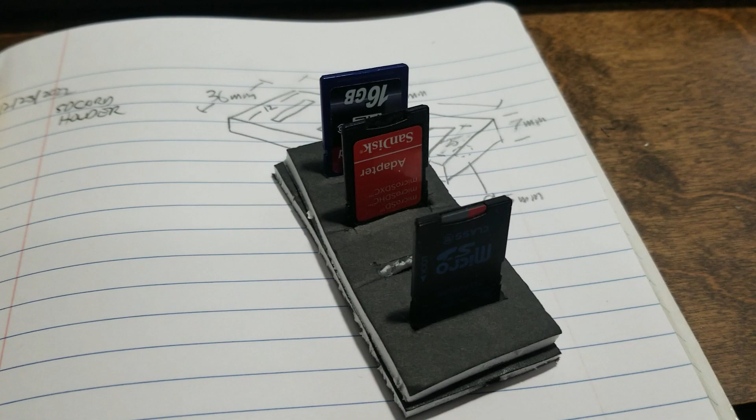I'm going to create an SD card holder that'll come in handy for the 3D printer. I made a little prototype of what it looks like. There'll be slots where you can stick the SD cards in, and there's going to be some magnets on the back. So I created a little prototype to figure out the right sizes, and then I drew a little sketch so I know all my dimensions. We'll make this in Onshape and 3D print it.

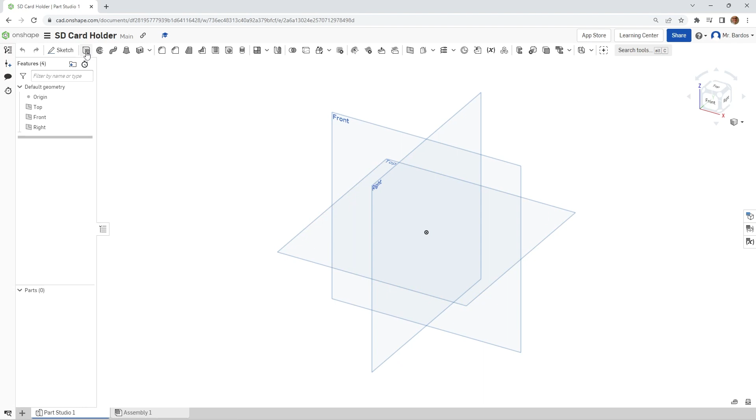So when you go into Onshape, you're going to create a document. Every object you create starts out with a sketch, so first you're going to pick where you want to draw the sketch. I'll have my sketch on the top plane, so I'll click Sketch, click on the top plane.

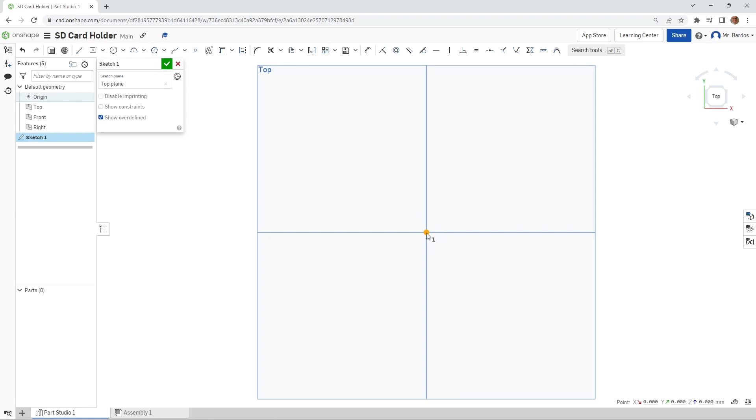I can draw right now, but it's kind of awkward looking at it at an angle, so I'm going to click on top here and we'll look straight down onto the top plane. So I'm clicking on Center Point Rectangle, and I'll start by drawing a rectangle.

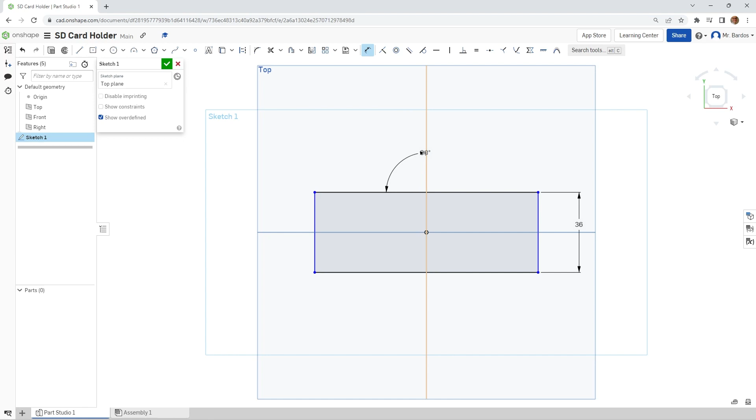First I'm just going to draw a rectangle, and now we can click a dimensioning tool to make the rectangle the right size. According to my sketch, I wanted this 36 millimeters, and I wanted this to be, let's start with 76 and see how that looks. Click on this one, 76 millimeters. We can change these later. Double click on that, fix that back again. Okay, so now we have the dimensions that I want.

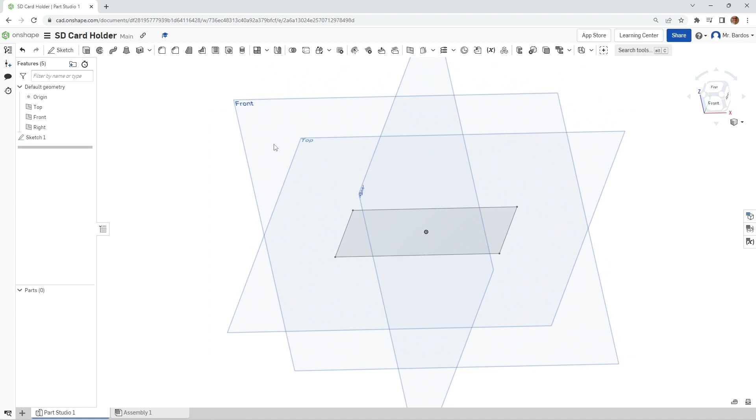These constraints are very useful, and we'll look at those a little bit more later. So right now, if I click on check, I'm holding the right mouse button and scrolling around looking at this, it's just flat as a pancake. We need to give it some depth.

And that's what the extrude tool does. Click on extrude, click on this, and you can mark how deep you want it to be. I only want it to go up 7 millimeters, according to my prototype, and hit OK. And we have ourselves a box.

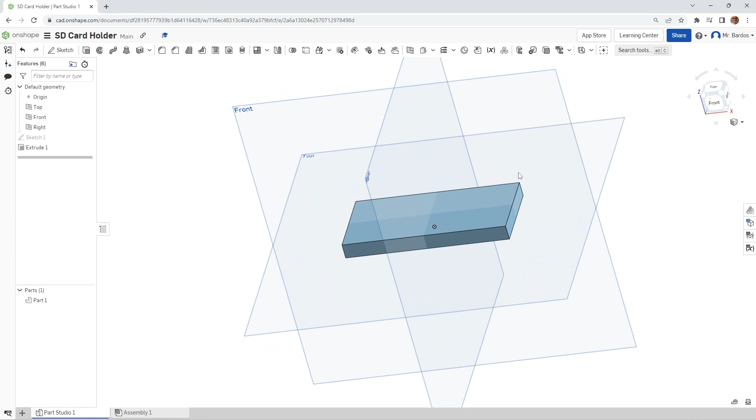Once again, I'm holding the right mouse button and moving my mouse around to scroll and pan like this. You can always click on this to go back to some standard view. To zoom in and out, I'm moving the wheel on the mouse in and out. Okay, let's go back to the top view.

Well, actually, before we do that, I'm going to make the slots for the SD cards to go in. And I'm not going to draw it on the top plane, I'm going to draw it on this top surface. So I hit Sketch and click on the top surface.

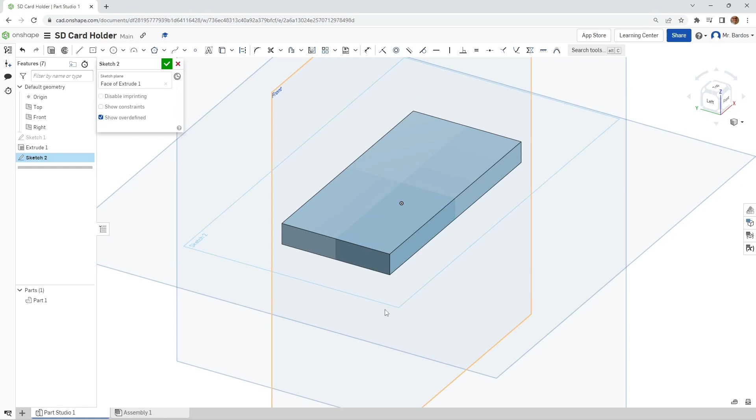So now I'm going to be drawing my rectangles on this surface. We'll go back to top view, look straight down on this, and create another rectangle. And again, I'm still using center point rectangle.

You don't have to stop and use the different dimensioning tools, although it is handy. You can just type in the dimensions when you first create an object. So I wanted this to be 2.5 millimeters wide and 25 millimeters deep. And I want 4 of these.

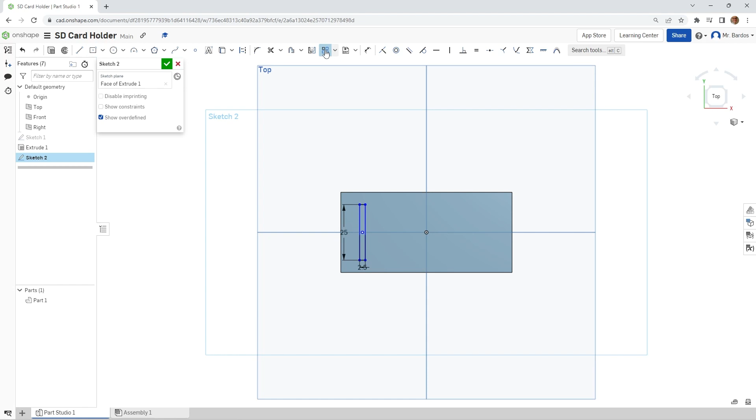Instead of drawing these over and over again, there's a tool that'll create a linear pattern. So I click on that, click on the objects that I want to repeat. I'm going to zoom in a little bit. It says I'm making 3 of these and going across. I'll double click on that to make it 4 of them. And here's where I get to specify how far apart they are.

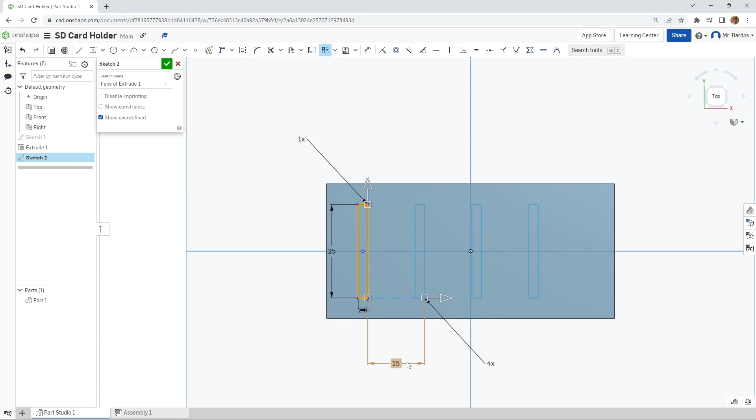Again, from my prototype, I think I wanted 15. Let's take a look at that. And there are 4 evenly spaced rectangles. So right now it shows that I should click on the left mouse button to finish this.

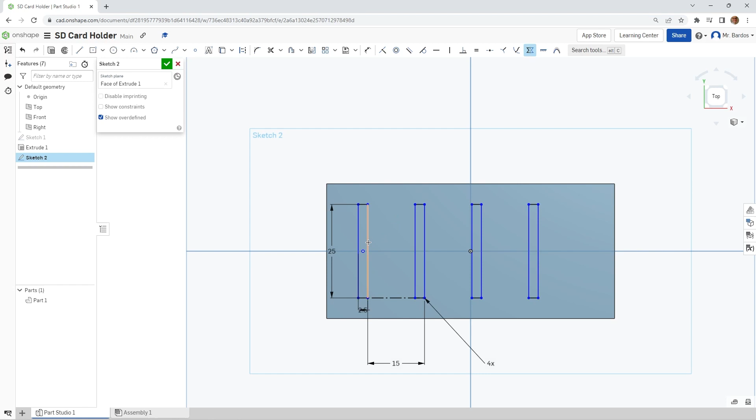Now these aren't centered correctly, so I want to make them centered about this middle line. And there is a constraint that we can use that says we can make things symmetric. So this tells us what to do. We click on this, and I want to make this and this symmetric about this axis.

So I clicked on those three things and I moved things over. No matter how big we make this or move things around, these things will always be mirrored, essentially mirrored along the y-axis here.

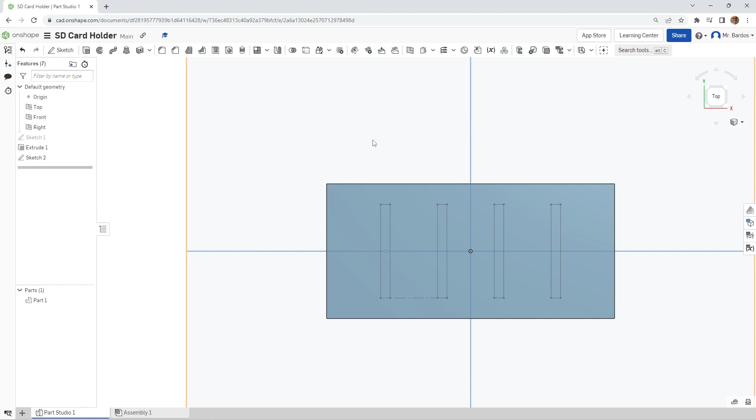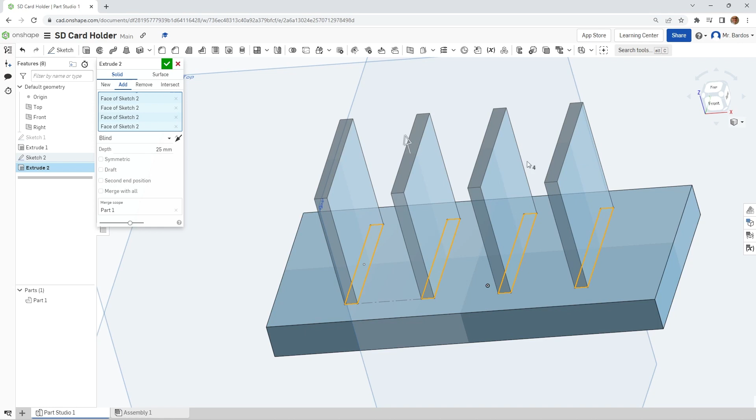So these are going to be the holes where the SD card goes in, and right now we have to take the material out of these holes. This is also an extrude. So when we extrude, it defaulted to either adding material or adding a new part. But in this case, instead of adding material, we're going to remove material. Now I removed way too much—the whole thing was 7 millimeters deep, and I think I only want to go down partway.

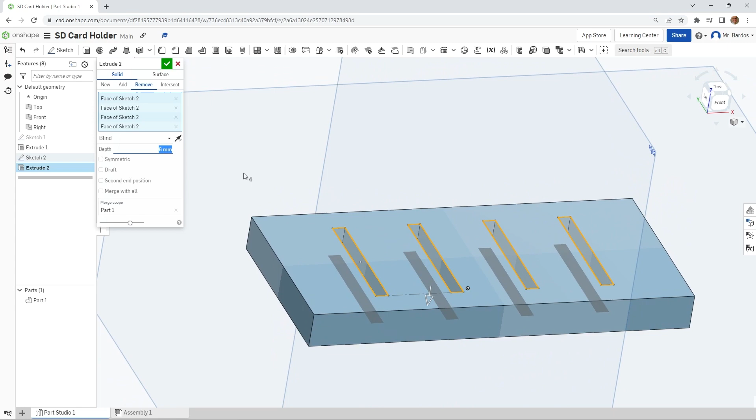Let's only leave maybe 1 millimeter on the bottom. It doesn't need to be that strong, so let's actually go down 6 millimeters. Now this has cut out the slots that we need for our SD cards.

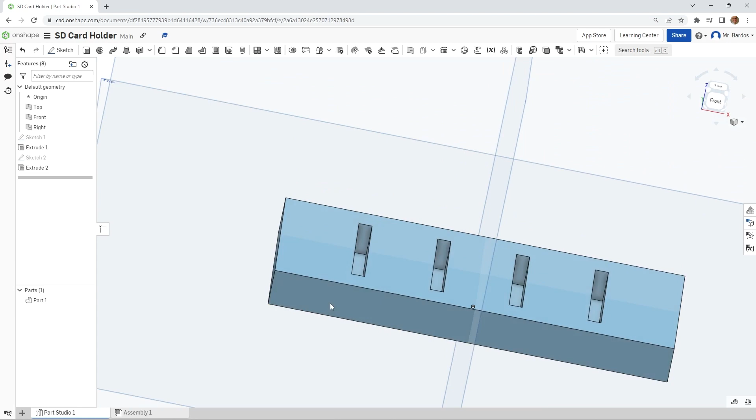Okay, so let's now go to the bottom and make the holes for where we want to stick the magnets. Now this one, we could have drawn the holes at the beginning because I want to draw the holes on the same plane as where we drew the box to begin with.

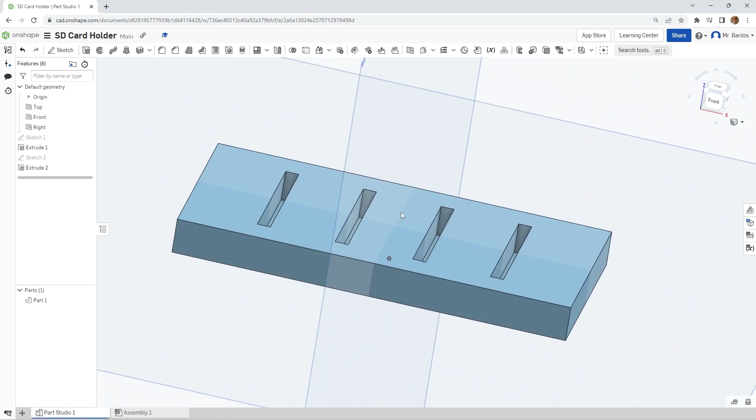By the way, to move things around like this, I'm holding the mouse wheel in and dragging the mouse. If you spin the mouse wheel, it goes in and out. Once again, the right button spins it around so I can look around, and you can always go to some standard view this way.

So what I want to do is, instead of just drawing the rectangle on the bottom on the very first sketch, I wanted to draw a rectangle with some circles. Let's double click on the sketch again so we can edit it.

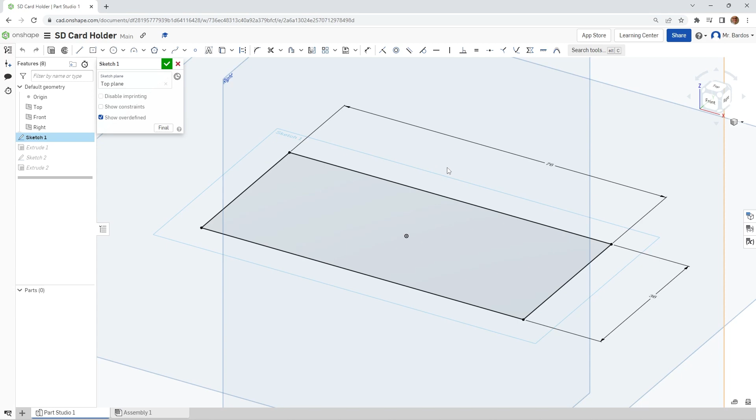So let's go to top view again, and I want the two circles where I want to put the magnets, and I know the magnets are 5 millimeters in diameter. By the way, in the 3D printer I probably have to make things a little bit bigger than exactly 5. So I'll double click on this and make it 5.2, just to give it a tiny bit more room to fit the magnet in.

Now this one, I don't need to use the repeat tool. I just want another one exactly like this over here, and we can actually use the mirror. I'm going to mirror this object about this line, and this is the object, so it makes another object.

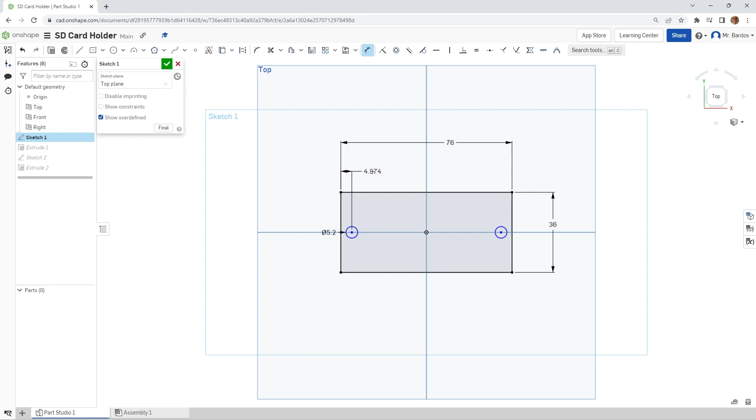And let's also position it. I'm going to click from here to there. I want that distance maybe a little bit farther in from the edge, maybe 5.5. Let's try a little more, 6.

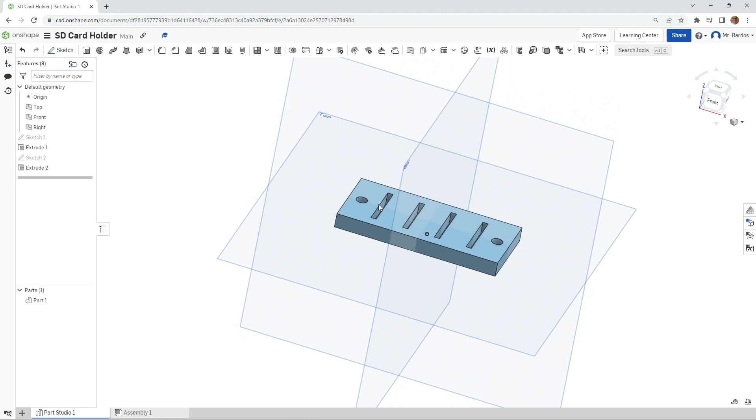Okay, so what happened here is it did draw those, but you notice that when it extruded the very beginning, when it made this first box, it did not extrude these. So let's go back and edit this next extrude. The extrude didn't include these holes, but I do want to make those solid because I don't want the holes to go all the way through. So if I just click on those holes, it'll fill those holes.

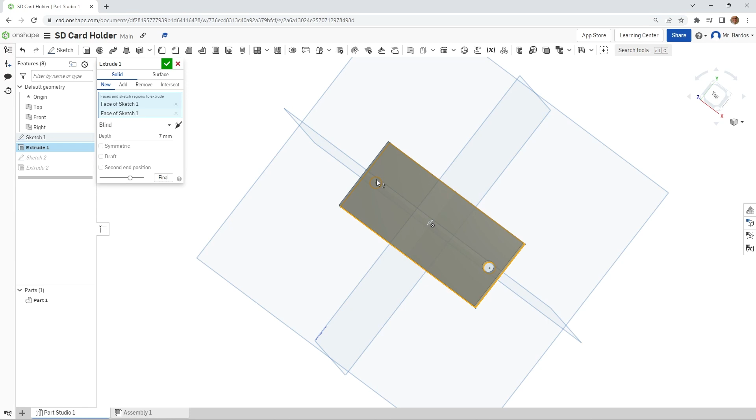Okay, so now I want to go back and make another extrude to make the holes. First of all, the very first sketch, I do need to see that. It's hidden right now, so I'll click on OK, and I'm going to click on the eyeball so now I can see it. I can still see it.

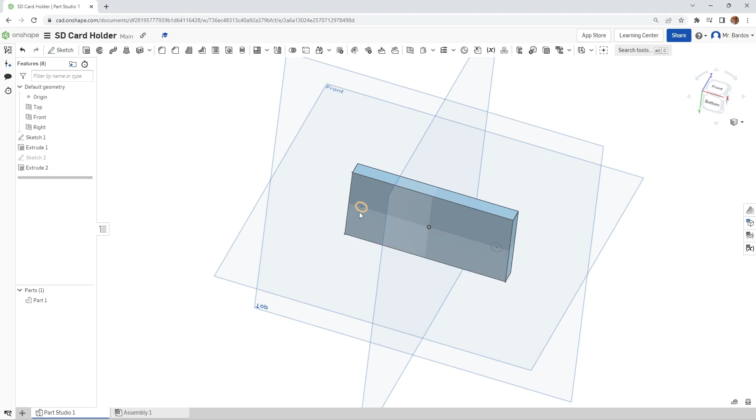And I'll make one more extrude where we can take these holes out, and we're going to remove material from this. Looks like the remove is trying to go down. Well, I'm upside down, so we can switch the direction and have the remove go up. And the magnets are only 3 millimeters thick, deep, so I'll click 3 there.

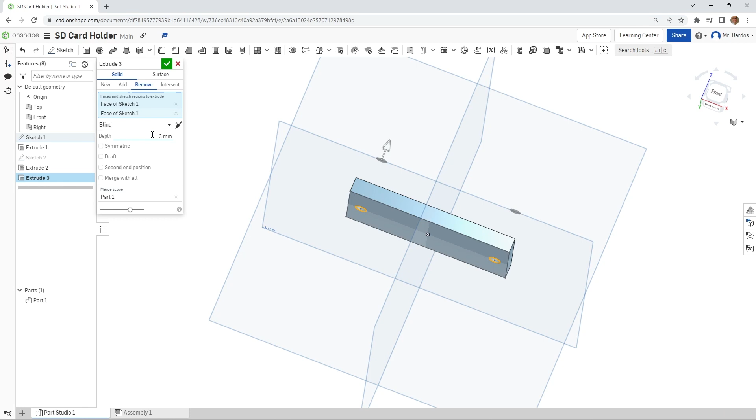So now we have holes. Let me hit OK here. We have holes on the bottom, and I think we're almost done.

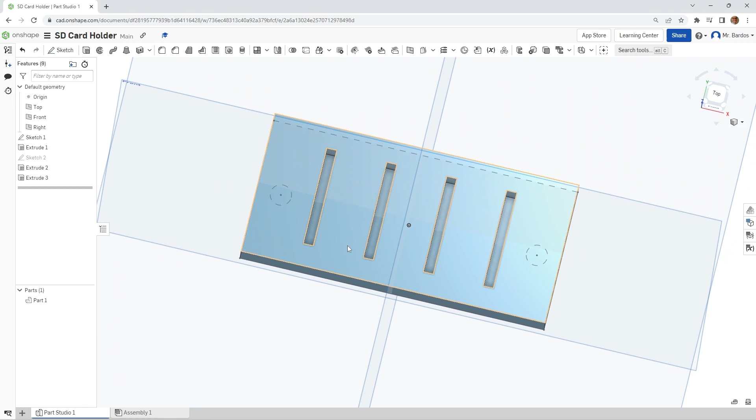Okay, one thing of interest is that, let's say we decide later on that maybe this is a little too big, I don't quite need it that big. So what I'm going to do is go back to the original sketch, click on 76, and let's make that 72 instead. Everything adjusts. This thing got smaller, these things went in closer. The 5.2 was, I mean, the diameter is still the same, but there's still 6 millimeters in.

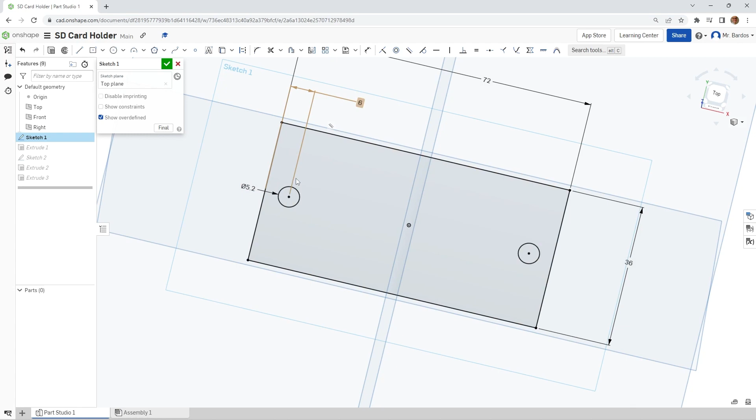So this is the wonderful thing about CAD, is that you can go back and tweak things.

Okay, now let's just pretty it up. This is almost done, I just want to round off the corners. I'm going to go to the fillet tool and click on these edges. It's rounded quite a bit.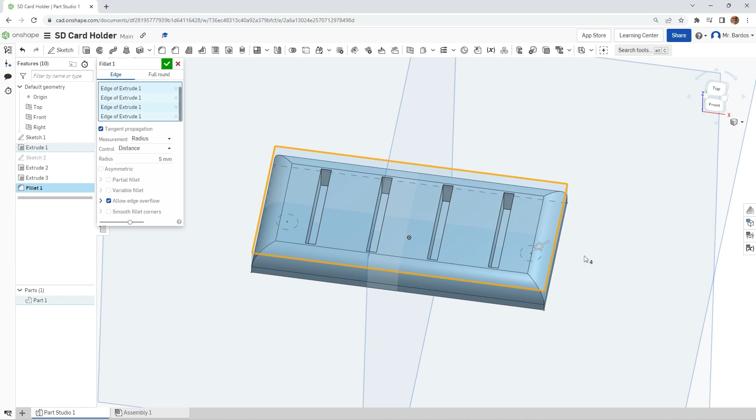Why not, let's keep it that way. I don't know, I think that looks a little bit too goofy. Let me try just, let's say 3 millimeters instead. I kind of like that a little better.

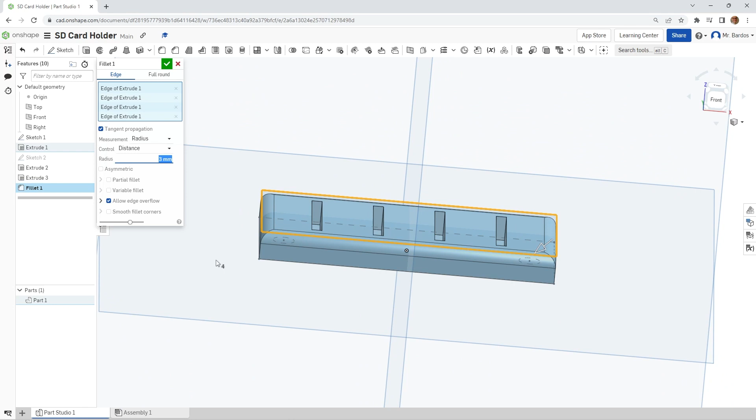Let me keep on going. I'm going to round off this edge as well. And that should be that.

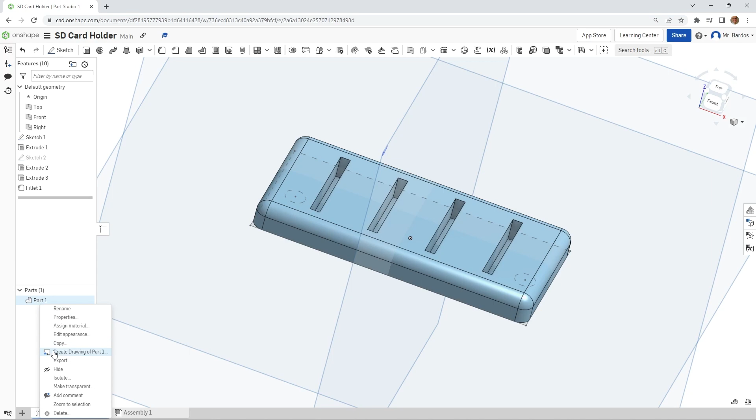Okay, when it comes time to 3D print it, everything looks good. We have a part, we're going to right click and export the part. And we're going to export an STL file, leave it binary, units are in millimeters, and export away.

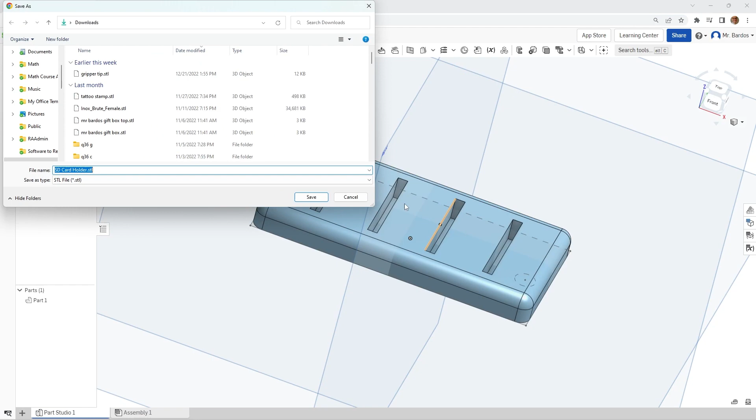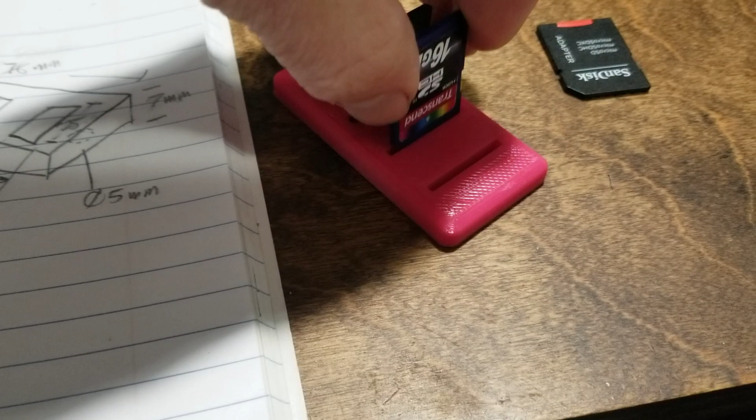And this is what's going to be taken into Cura to slice and then put in the 3D printer. And the part came out perfect. So the SD cards fit in there, and there are magnets on the bottom to hold it onto the 3D printer.